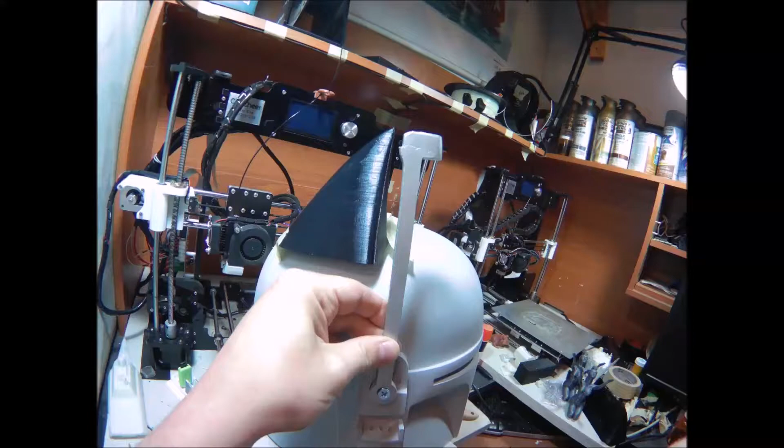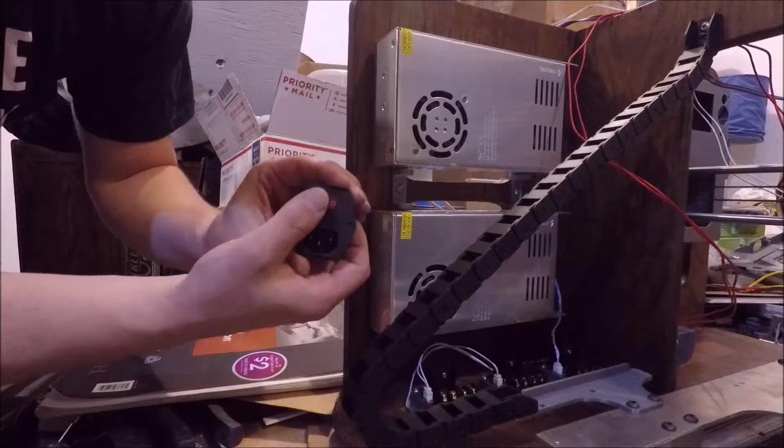My name is Tim. So today, just to show that this design is definitely not finished yet, we're still working out some of the details. I need to mount this power switch, fuse, and plug receptacle somewhere around the power supplies. Now my original plan was to have it sit sideways like this and stick over, but it's awful tight in here. I thought maybe this low profile would look really good.

I don't think I'm going to go for that. My second thought was to move it down below the power supplies and set it down here, but I don't like that either. So my thought is to actually mount it something like this, tucked into the framework here.

And we're going to integrate this mount as part of this housing, so it's all one unified unit. But yeah, so that's what we're doing. I'm going to take some measurements and figure out what I want to do.

I already preloaded some of this stuff into my little CAD program I use, so it'll be a lot easier to just pick up wherever I leave off here. I think I just really need this back spacing measurement, because it looks like as long as I center up this device, it'll be almost flush with that when it gets done. Anyway, bring you back once we get into the program.

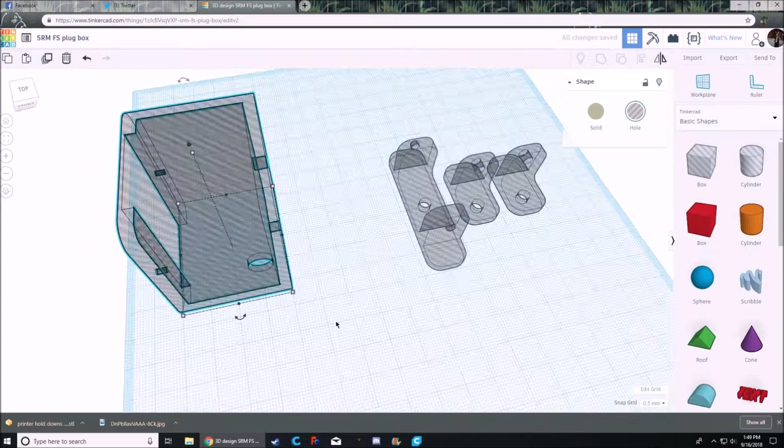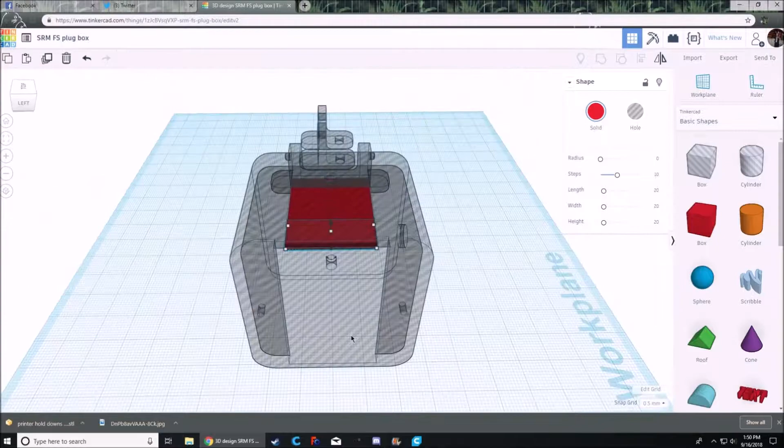So the first thing we're going to do is start lining up these STLs that I have, and then we're going to make a new base plate. I'm just using the original STLs as kind of my starting point. I know how far I need to go to make clearance for the power supplies, and then I took and duplicated it so I can make the stick-out wide portion that's going to overlap the edges of the power supplies. So that's kind of my basic reference.

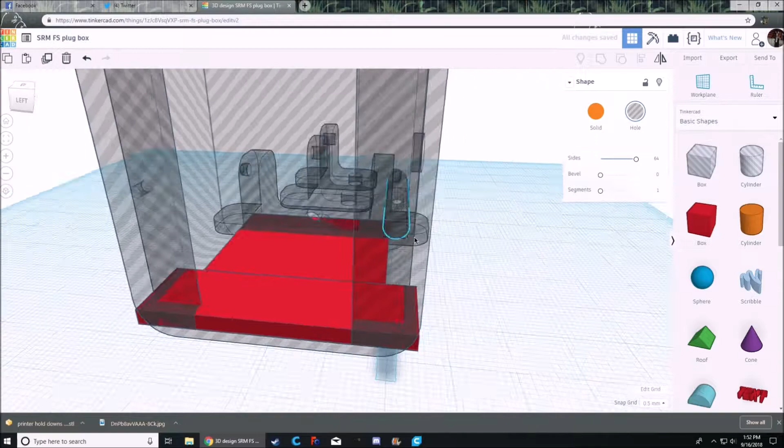From here I'm going to develop or put the holes in their locations, because ultimately this piece that I have the cutout of is going to go away. It was designed for a different project and won't work in this particular application.

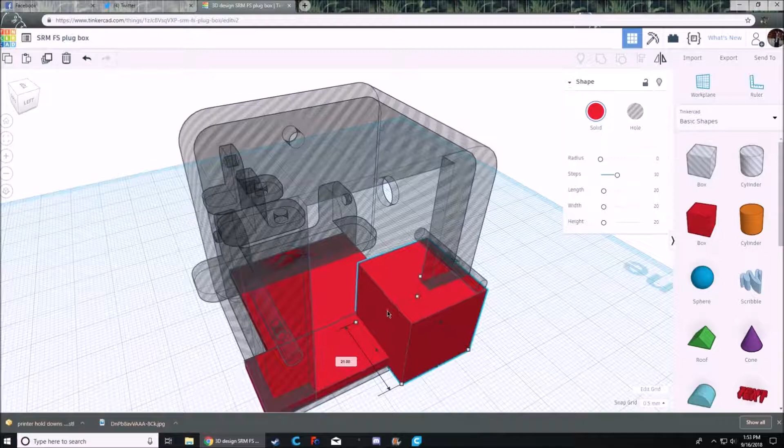Now that I have the holes located for where the screws will actually go through, we're going to start building up the sides of this box. Just basically line up another square and bring it up to the right height. And then once that's all good to go, I will duplicate it, drag it to the other side, duplicate the bottom, bring that up to the top.

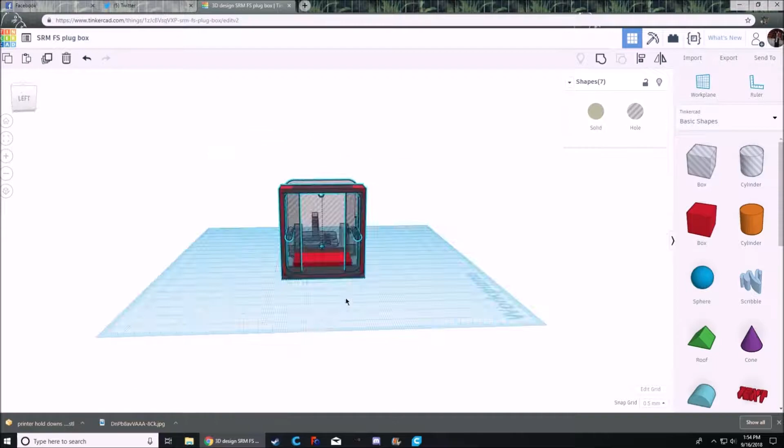At which point I realized that my piece was out of position and needed to be shaped different, so I rolled it around and dragged it up a little bit. Then I'll make the back piece the same thickness so I don't have a weird step on the inside of my part, and repeating.

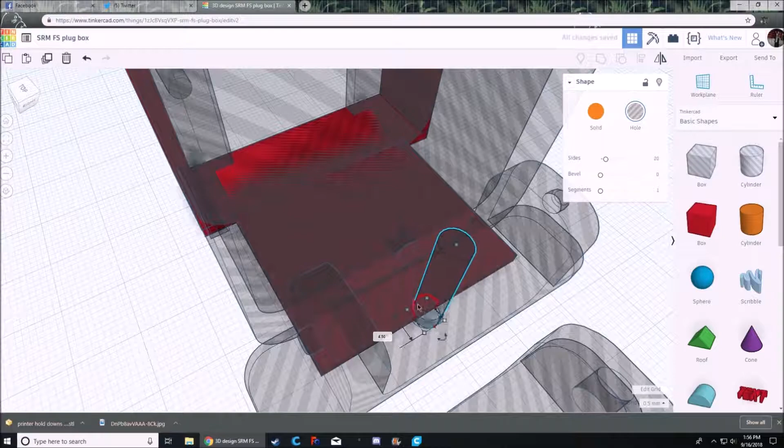This is one of those frustrating parts about this particular program. You get out of position, it's sometimes hard to maneuver things around. But anyway, so I got this hole all squared away, and now we're going to start building up more of the sides of the box.

I wasn't sure how this was going to be shaped in the end, so I just started laying pieces out till I was kind of happy with them, and then ended up changing them all a whole bunch, as you guys will see here just shortly.

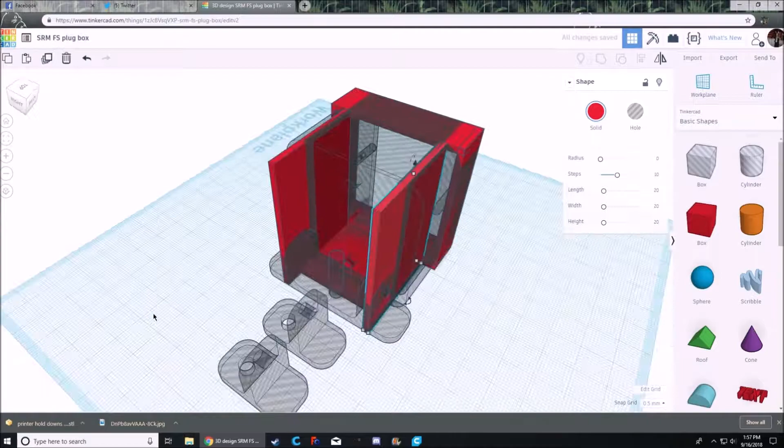When I moved this other piece out of the way, I made sure I lined it back up on the same plane that it was before, so that way if I needed to change anything, it would be no big deal. I could put it right back and realign it.

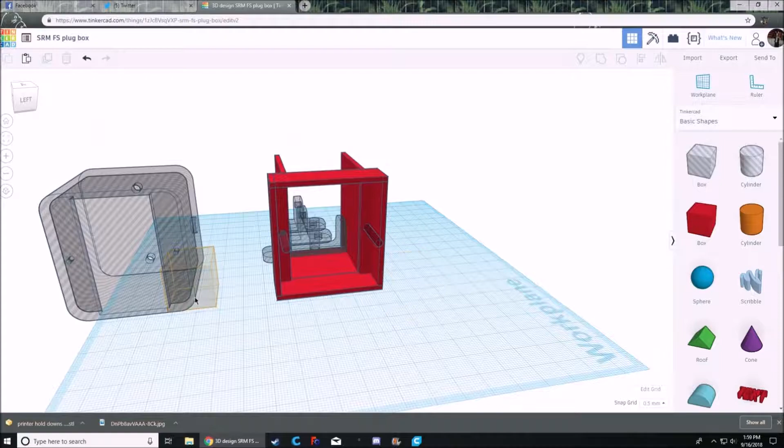Here I'm just closing up the back side of the plug box, and I'm again using the original piece as a thickness template. So now I know exactly how wide those side wings are supposed to be. And once you do one, you just go and duplicate it and make another one for the other side.

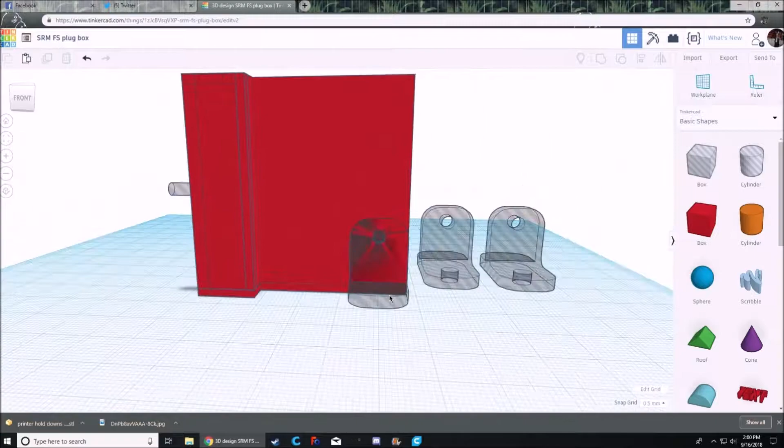So the original design plan was to actually have the cables come out around where the mounting screw was going to be, and then use the upper half of this housing to clamp the cables in place.

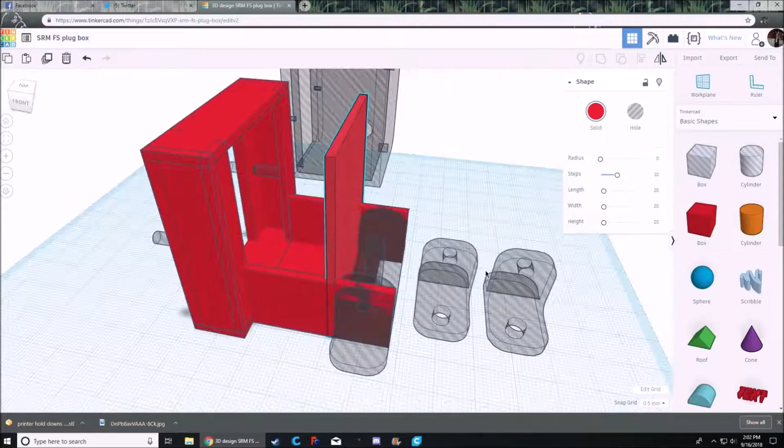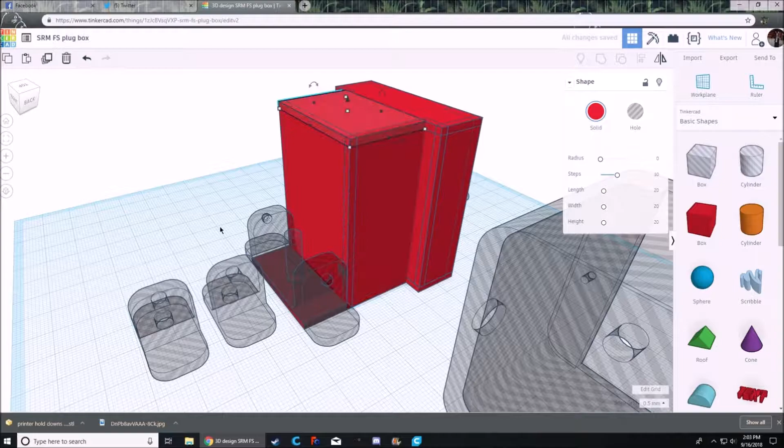Decided I didn't really like that overall plan, so I altered it so that screw mount is all by itself. We're just kind of feeling this out as we go, so there I extended the base plates. Now we're completely across. I need to duplicate some of the other features, so here I am just undoing what I just did. So there's the basic box.

Then we're going to add in some new ears. Oh, I guess we're adding in the lower ears first, and we'll add in the upper ears here. Duplicate it again, go on to the other side.

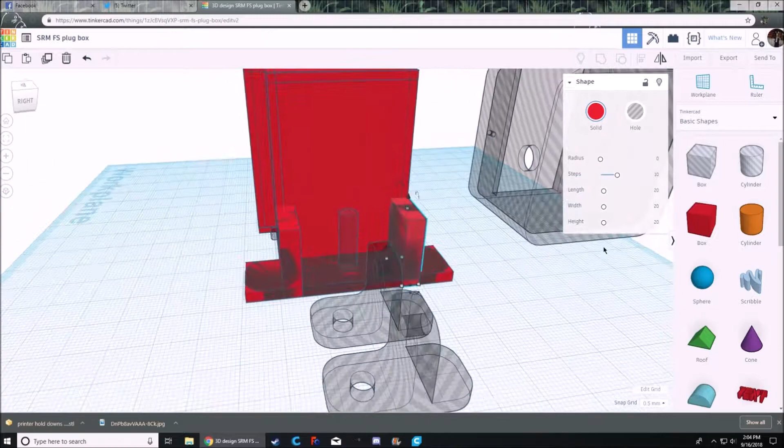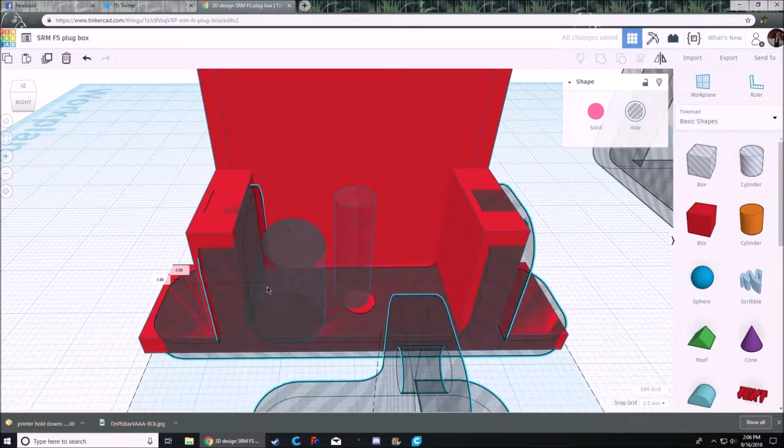Up next, we're going to make the pass-through holes for the cabling. There's actually going to be 2 holes in the back here. Basically what I'm doing is making the holes just a little bit oversized, and eventually there'll be a clamp that the mounting screw will lock onto. So here I'm duplicating that, and again, it's very difficult to maneuver things with this program sometimes.

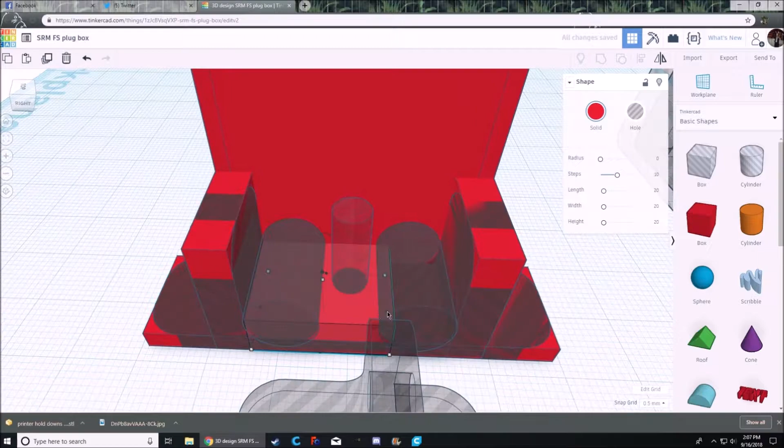So those punch through, they're nice and centered. We'll leave those alone, and I think we're getting to the point where, okay, that's right, we're gonna make our new base plate. It runs all the way across at the halfway point on those cylinders. Now we've got a couple details we need to recreate. We need to recreate these dowels.

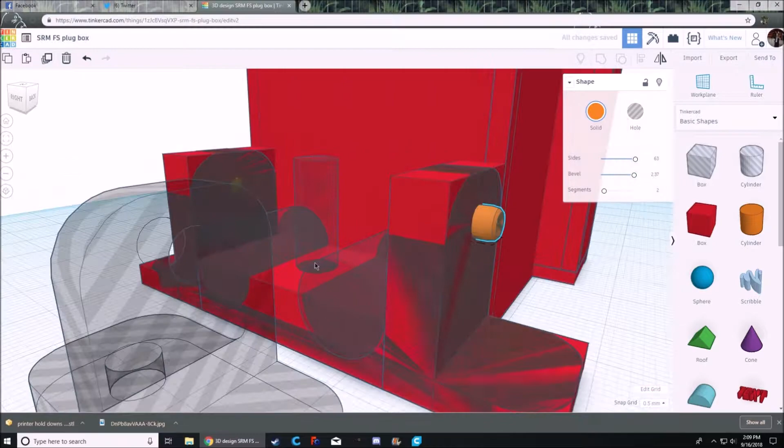So they had a little bit of a chamfer on the end of them. I'm just using the original one to duplicate it. Everything's all nice and lined up now, so I can remove my template piece. And now we get into the fun part, where I got to start cleaning up this overall design.

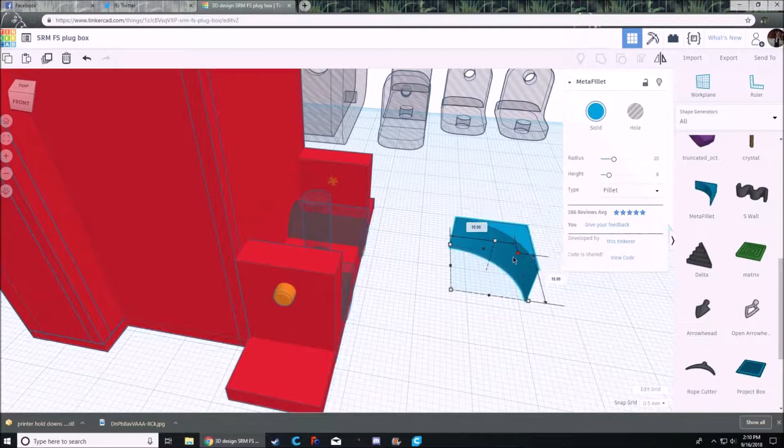Tinkercad used to have this fillet that was right in their featured shape generators. Now they moved it, which makes it not quite so convenient to find, but yeah, you just gotta keep digging. So I'm just going to use this to round all the corners off, and again, making sure you click off of each piece before you duplicate it, because otherwise you'll end up duplicating funky and doing weirdness.

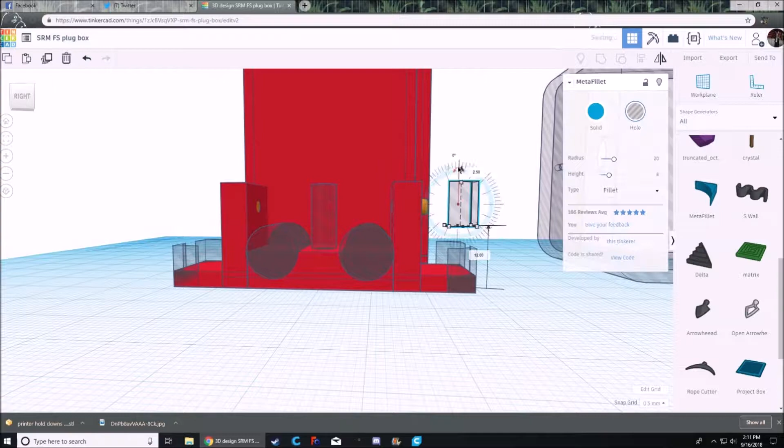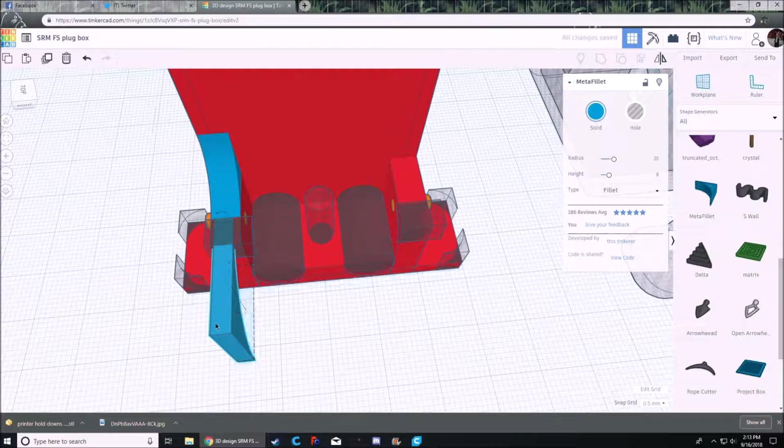So I'm going to bring this piece up and position it there. Duplicate, move it over, so now we've got all those corners rounded. And we're going to rotate this 180. Narrow it up, and then we're going to turn it into a solid piece once I get it all figured out how I want it to be shaped. So I hit duplicate and it actually distorted it, so I had to click off and re-duplicate it again.

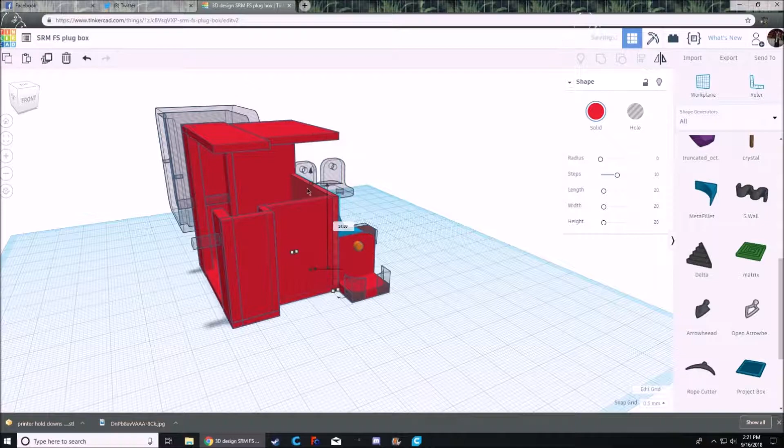It took me a little bit of time to decide how I was going to split this housing apart, so I ended up just making an arbitrary cut, and then very carefully bringing down each of the sides to match that overall height. Then what I'm going to do is select just those pieces, duplicate them, bring them up, and change the color on them to make it a little easier. And I'm just going to bring it all down to square up the height there.

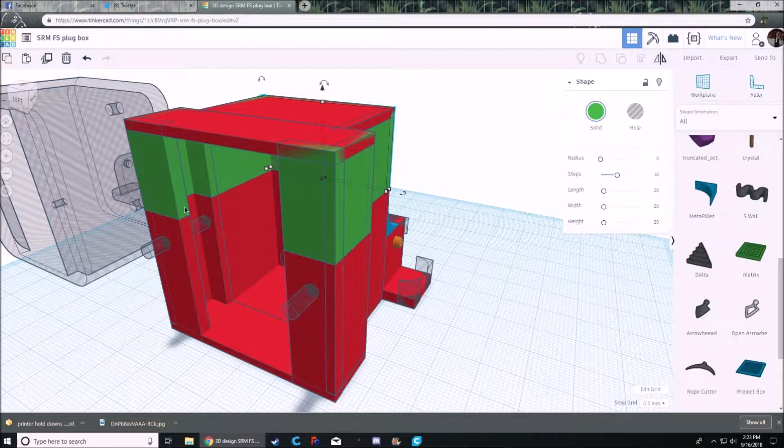That made it a lot easier to differentiate which pieces go where in this design. A lot of times in this program I'll make this back panel in like 2 pieces, so that way I can have a dedicated center line. It makes it a lot easier to line stuff up.

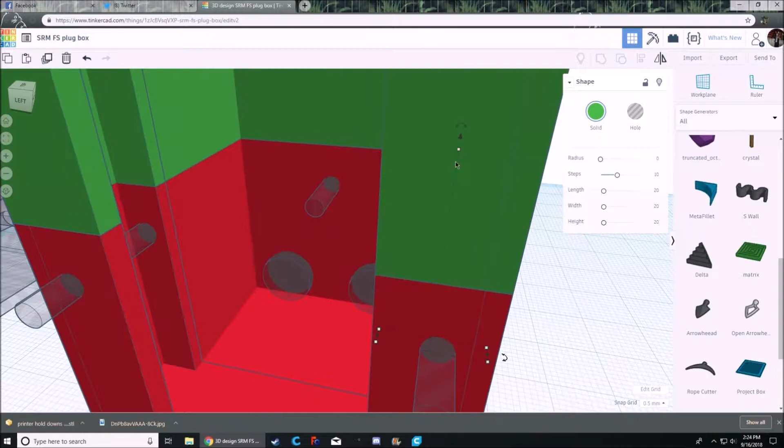So when I was working on the FS plug box, I did a lot of things off of the center line like that. But here I am just making a little drop-down tab, and then I'm going to duplicate it, bring it over to the other side, and just still playing with it, seeing how I want to do this from a structural standpoint.

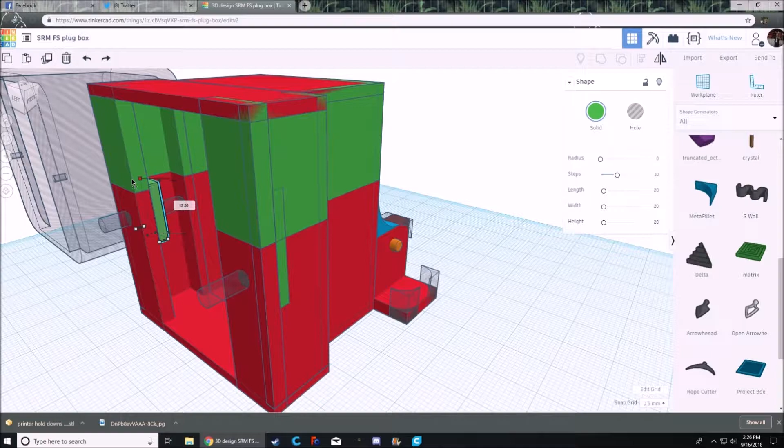I actually undid what I did there, and brought it where it had a little bit of overlap, and I'm going to add a bevel piece on the back of it, just so it prints really nicely, because this top piece will be printed on its back, and the bottom piece will be printed on its front. It's kind of important when you're working on a design to know which orientation you want to print everything.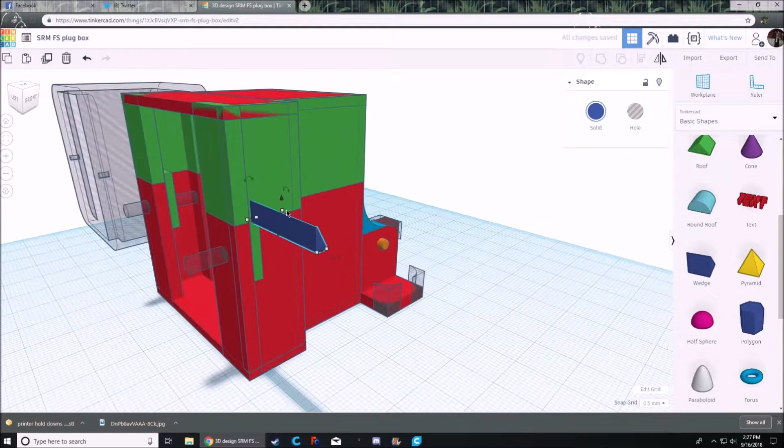So now I got the first one in place. I just duplicated it and reduced it down to the final size. That should work, so I just position the next one in place, rotate it 180 out, and again just verify it's flush up against the back wall and centered on the part.

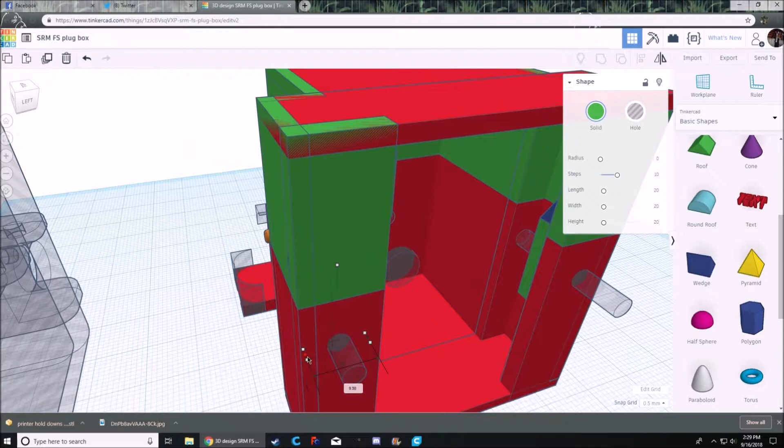Now I'm trimming the drop down tab just a little bit, so that when I split these two pieces, they won't overlap at all. That would cause some serious issues once it gets all done.

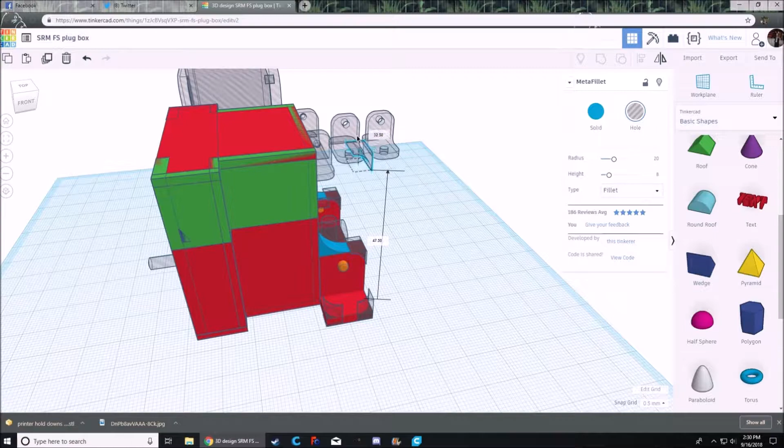Now I'm giving the part a quick once-over before I start chamfering the edges, and it took me a little bit of thought to decide what parts needed to be chamfered and which ones weren't.

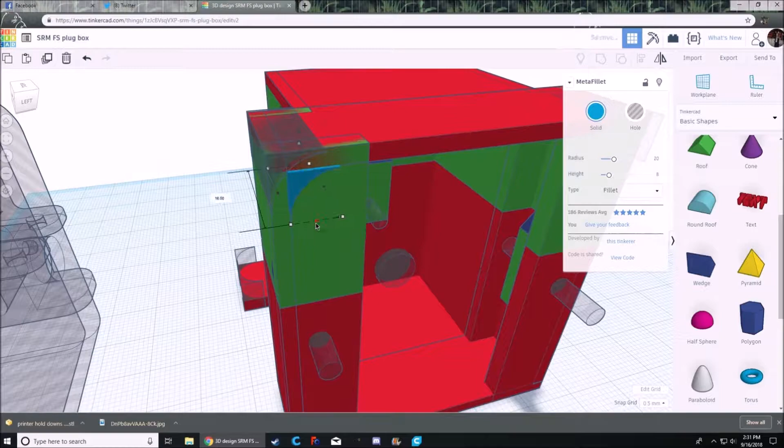So this edge is good. I'm going to duplicate it on the other side, and then take the exact same piece and reduce it down for the inside. That'll give me a nice thick wall all the way around. Should print really nicely when we're done.

Up next is a little bit of detail work. Once I get this little chamfered edge done, we're going to get rid of the squared off corners on the inside of this design.

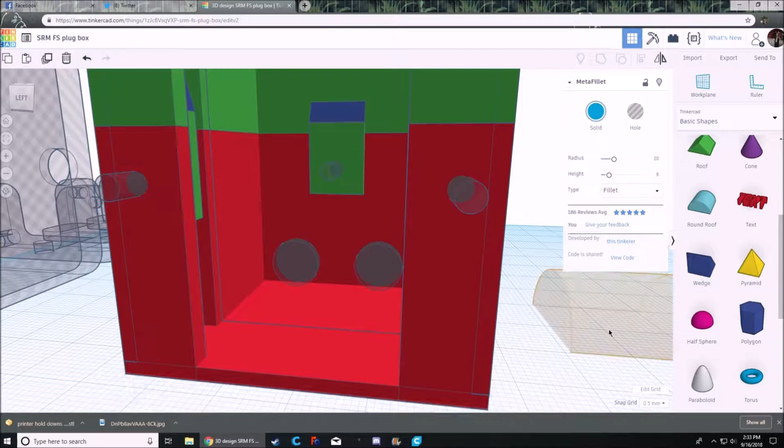So I'm going to bring over a roof, one of the round roof sections, set it to the same width and everything, rotate it around, and the same depth. Then we're going to line it up on the center line there and get it just perfect.

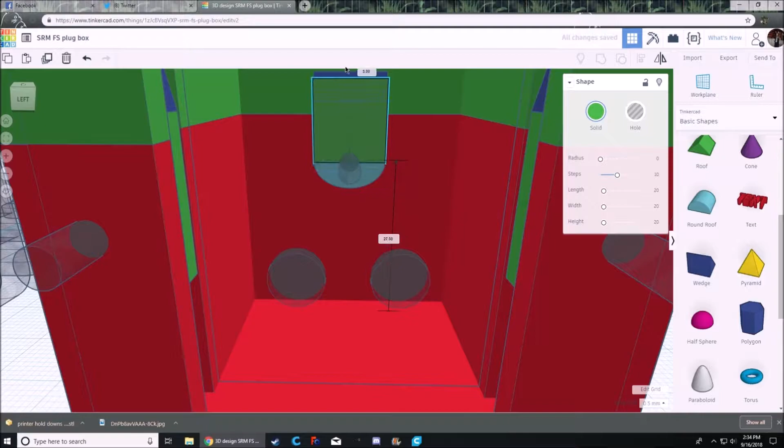I sat there and played with it just a little bit till I was happy with it. So there's our first piece done. Then we're going to bring those up to the same overall position before we duplicate the round section.

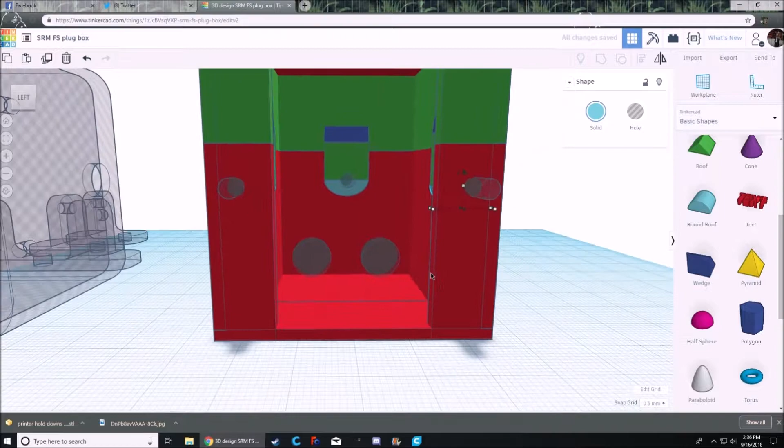I made a choice here that was kind of a pain, because I didn't have a better way of doing it without totally dividing things up and trying to reproduce it. So I opted to just leave the ends of that roof section sticking through, and then I used the actual framework to cut off the edges.

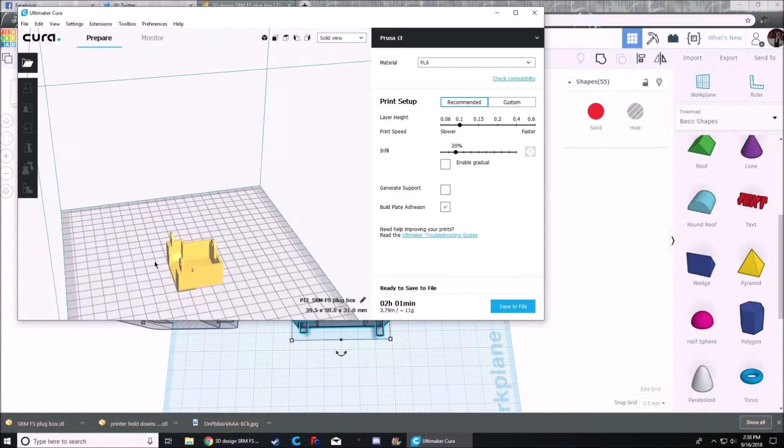So here we are, here's the first look at it. We're going to rotate it around. Now that looks like a good solid piece. Overall, we don't have any real sharp edges. It should print pretty good.

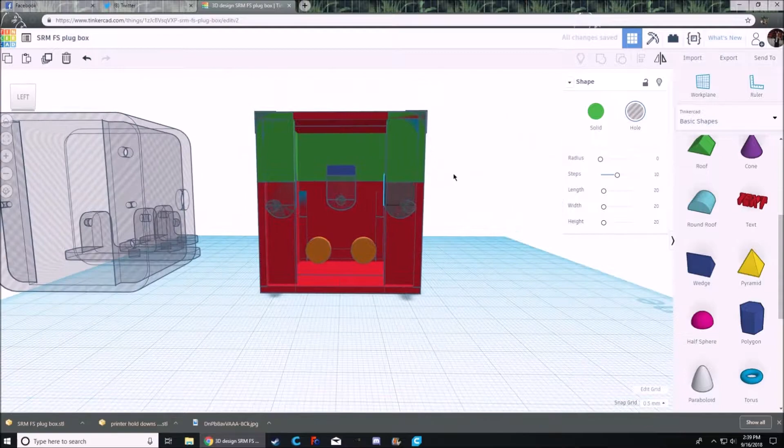So now we get to switch it back, and what I should have done is just hit the back button on the control panel to undo the change to a hole. That made it a little more difficult, but anyway, I ended up having to go back item by item for all the ones that were supposed to be negative and reselect them as negatives. Not the end of the world, but I selected the whole thing and printed it off again.

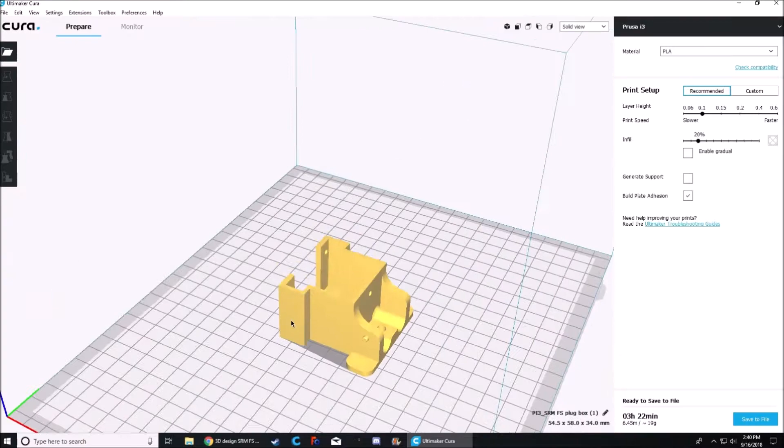And here we are, we've got a nice clean model. Overall, I think it looks pretty good. It will fit the job very well. All right, I'm going to call this project a wrap. The mount worked out the way I was hoping it would. It's nice and snug and fairly low profile with the edge of the frame.

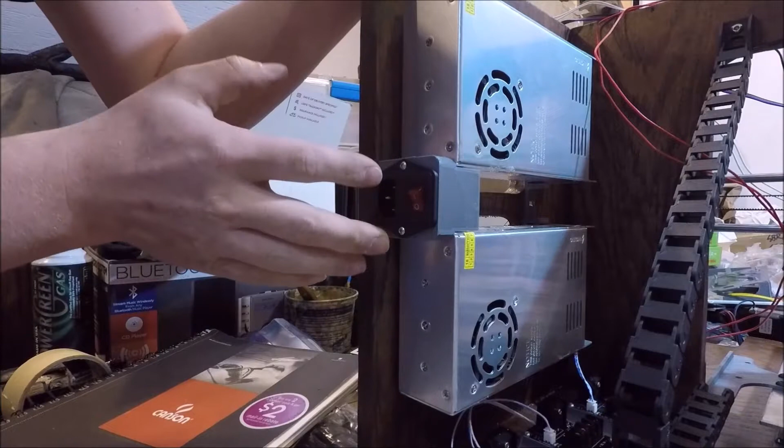To get access in here, you take off a screw in the back and 2 screws in the front. They're not the most convenient in the world to get access to, but then this cover just lifts off and you'll be able to get into all the wiring for it.

It just has, I'm going to have it where it has an on-off switch. It also has a fuse, so you can't exceed 10 amps on this whole assembly. And then this is just a standard 3-prong cable, like you'd have for a computer monitor or a computer. So it's a fairly modular setup, nothing unusual here.

There's also 2 power cord outlets in the back, so I can feed each of these 2 power supplies comfortably. But anyway, you guys will get to see this in action once I get it wired up.